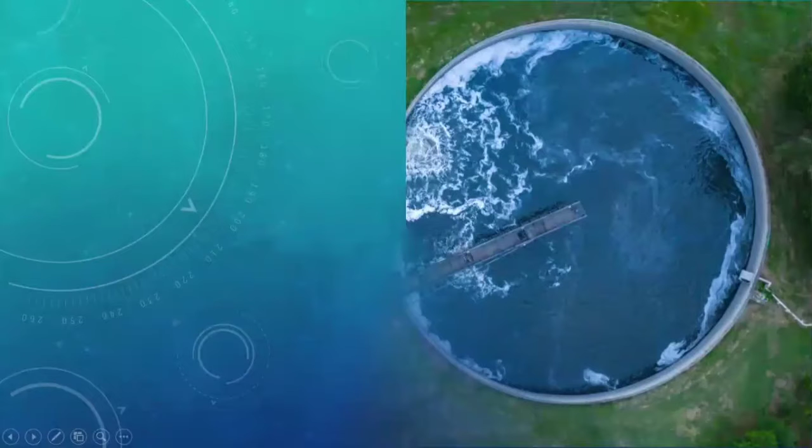Today we will discuss the importance of sewage treatment in India. This presentation is made by me, Nirmala Machi, and Songramjit Roy, from the Department of CSE Second Year, MCKVIE.

Some of the key points of this topic are: what is sewage, types of sewage, what is sewage treatment, objective, necessity of sewage treatment, advantages and disadvantages of sewage treatment plants in India, and many more.

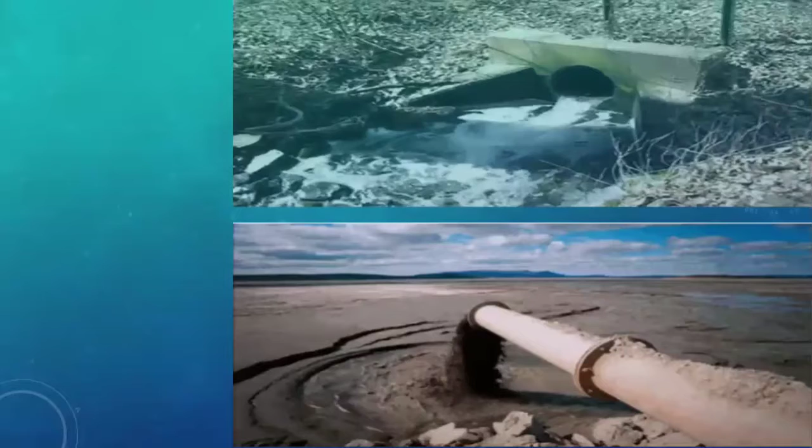Moving to the next slide, what is sewage? Sewage is a type of wastewater produced by a community of people. Sewage is more than 99% water, but the remaining material contains solid material, ions, and harmful bacteria. It is typically transported through a sewer system, mainly carried from residences and from commercial, institutional, and public facilities that exist in the locality.

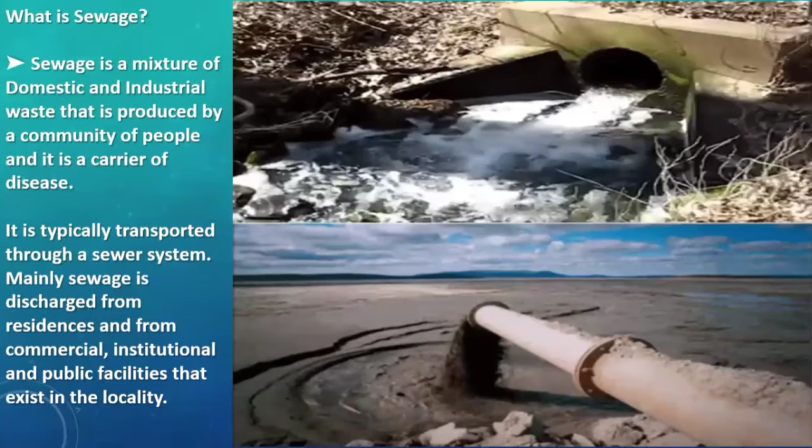What are the components of sewage? Sewage sludge is composed of both inorganic and organic materials: a large concentration of some plant nutrients, a much smaller concentration of numerous trace elements and organic chemicals, and some pathogens. According to researchers, an adult person produces around 162 liters of sewage per day.

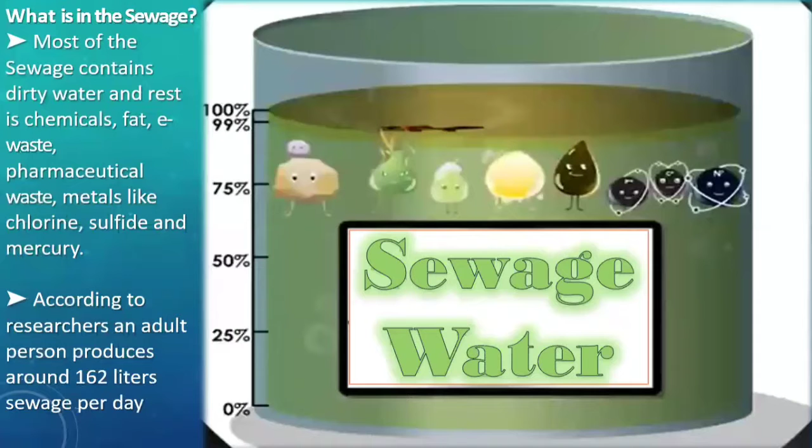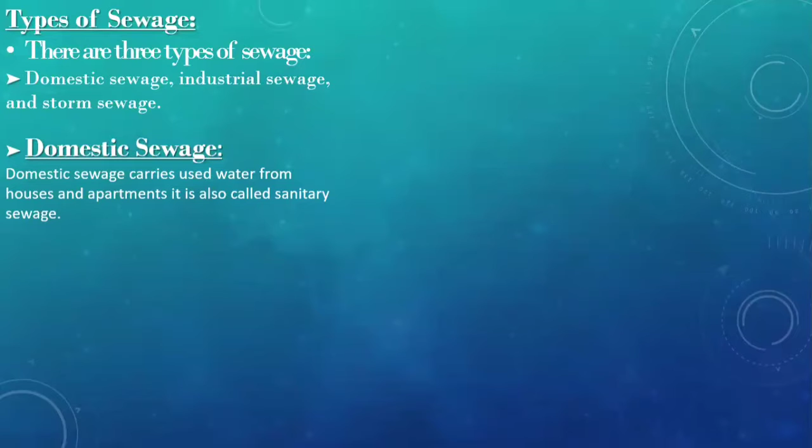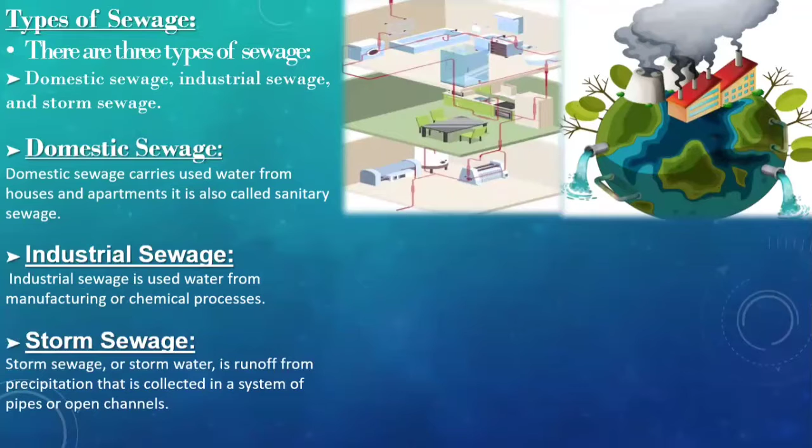Now we are discussing types of sewage. There are three types: domestic sewage, industrial sewage, and storm sewage. Domestic sewage carries used water from houses and apartments; it is also called sanitary sewage. Industrial sewage is used water from manufacturing or chemical processes. Storm sewage, or storm water, is runoff from precipitation that is collected in a system of pipes or open channels.

Now, how bad is wastewater for our environment? There are mainly 5 topics we are discussing. Number 1, water and habitat contamination. The most immediate effect of wastewater on the environment is that it contributes toward the contamination and destruction of natural habitats and the wildlife that live in these habitats, by exposing them to harmful chemicals that would otherwise not be present over the natural course of things.

Number 2, squalor. Wastewater is one of the worst sources and carriers of diseases. According to a report from WHO, more than 3.4 million people die each year from waterborne diseases. Besides the diseases wastewater carries, the combination of human waste, solvents, and paints create fumes that are not only putrid, but also expose people to harmful fumes.

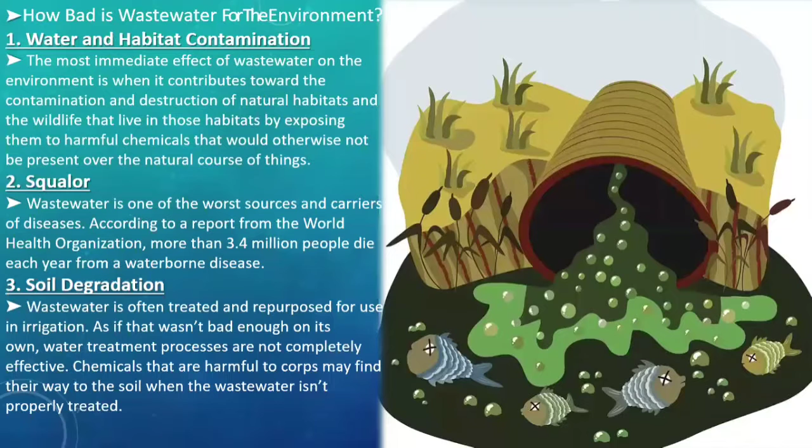Number 3, soil degradation. Wastewater is often treated and repurposed for use in irrigation, as if that wasn't bad enough on its own. Water treatment processes are not completely effective; chemicals harmful to crops find their way to the soil when wastewater isn't properly treated. These chemicals cause the soil to yield fewer crops at a slower rate. Consider also that these crops will eventually be eaten, which can also harm humans.

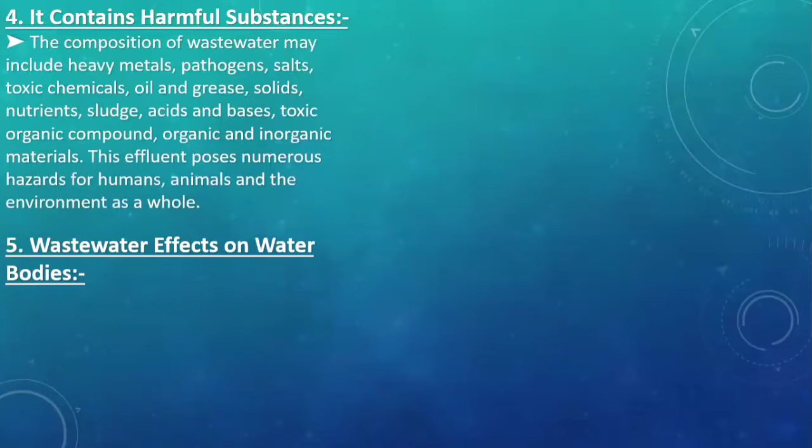Number 4, it contains harmful substances. The composition of wastewater may include heavy metals, pathogens, salts, toxic chemicals, oil and greases, solids, nutrients, sludges, acids and bases, toxic organic compounds, and organic and inorganic materials. This effluent poses numerous hazards for humans, animals, and the environment as a whole. It can be toxic, corrosive, reactive, acidic, and ignitable. Therefore, it must undergo treatment before being reused or redirected into the water supply.

Number 5, wastewater effects on water bodies. Waterways are generally most at risk to the harmful effects of wastewater. Toxic compounds in the effluent disrupt aquatic ecosystems. When a large amount of biodegradable substances end up in the water, organisms start to break them down and use a lot of dissolved oxygen, which is critical for marine life to thrive. As it becomes depleted, it can be life-threatening for fish.

Wastewater also contains oil and greases that are harder to break down and can settle on the surface of the water. This blocks the light that photosynthetic aquatic plants need. It can also suffocate fish and get caught in birds' feathers. Heavy metals such as lead and mercury are toxic to both humans and animals. If someone drank from or ate fish from a contaminated water source, they could suffer serious health effects. The same happens with animals and plants living in the water.

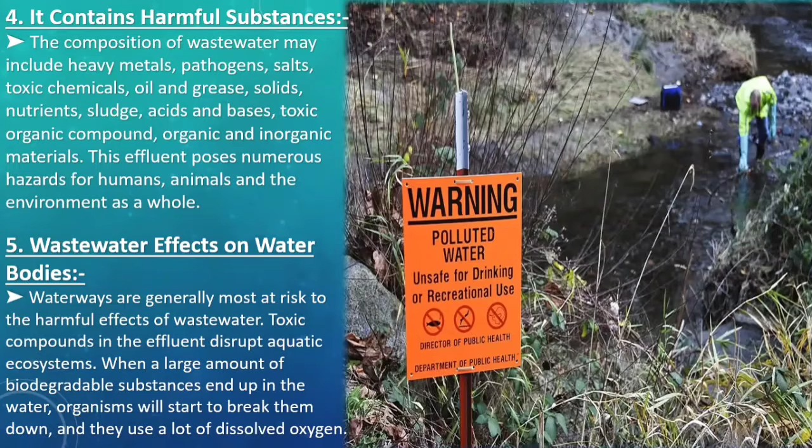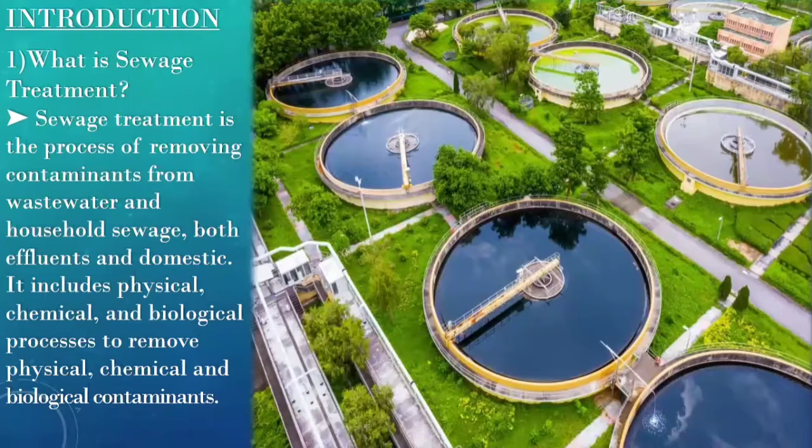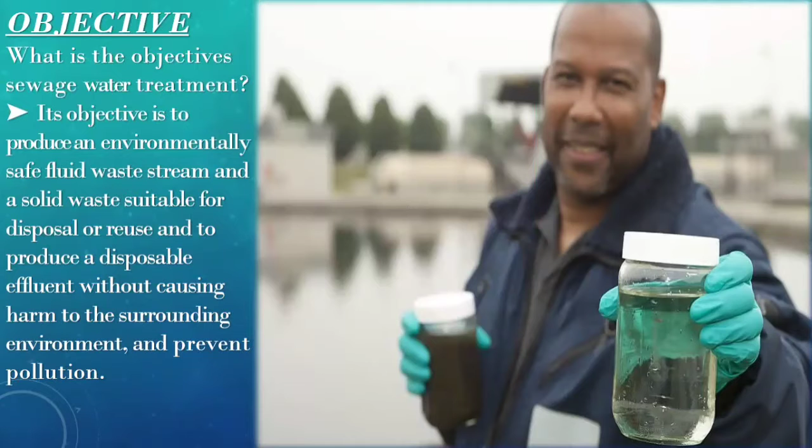Now, moving on to the introduction part: what is sewage treatment? Sewage treatment is a type of wastewater treatment which aims to remove contamination from sewage to produce an effluent suitable for discharge to the surrounding environment or intended reuse application, thereby preventing water pollution from raw sewage discharges. The objective of sewage treatment: the major aim of wastewater treatment is to remove as much suspended solids as possible before the remaining water, called effluent, is discharged back to the environment. As solid material decays, it uses up oxygen which is needed by the plants and animals living in the water.

Now, the necessity of sewage treatment. Sewage treatment plants play an important role for the community of people and our beloved environment. The main function of these plants is to clean the water that comes from home, commercial, and industrial streams.

The treatment of sewage water has become the need of the hour as it stops spreading the diseases and illness caused by sewage water. It helps society by making the water pollution free, and it also helps to clean the environment.

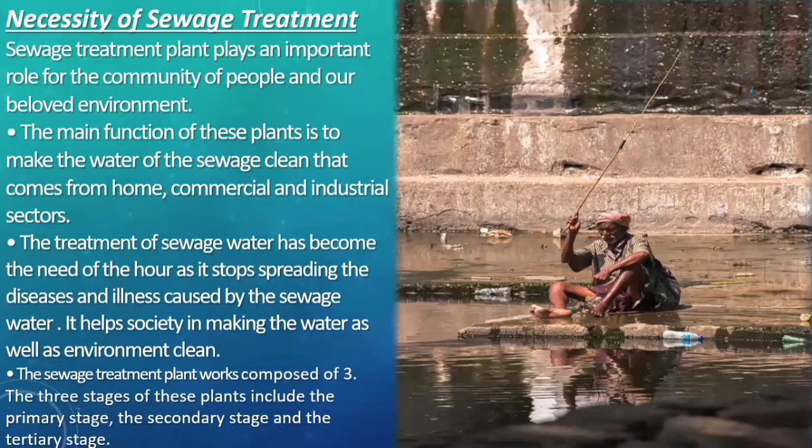The sewage treatment plant's work is composed of three stages. These include the primary stage, the secondary stage, and the tertiary stage. Now, I would like to invite Sangramjit to continue from the stages of sewage treatment.

Thank you, Nirmallo. Now we will see the stages of sewage treatment. There are three main parts of sewage treatment: primary treatment, secondary treatment, and tertiary treatment.

Primary treatment can be divided into three parts, namely screening, pumping, and grit removal, and primary clarification. Secondary treatment can be divided into three categories: aeration, secondary settling, and filtration. And the main part of the tertiary stage is disinfection.

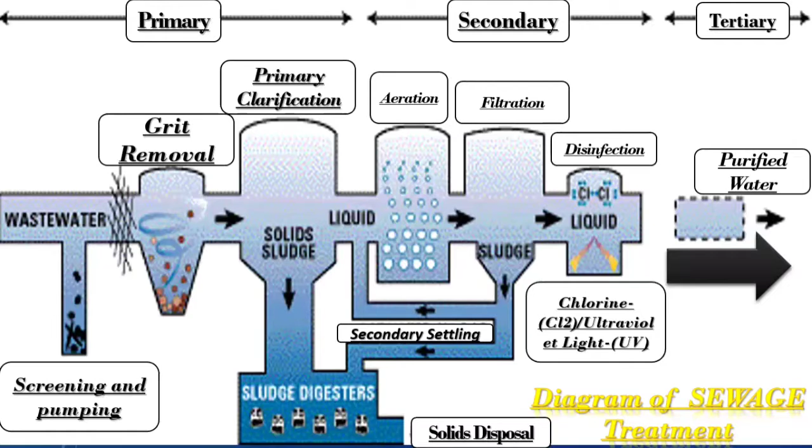Now we will see the primary stages of sewage treatment. Step 1 is screening and pumping. The incoming wastewater passes through screening equipment where objects such as rags, wood fragments, plastics, and greases are removed.

The material removed is washed and disposed of in a landfill. The screened wastewater is then pumped into the next step, grit removal.

Step 2 is grit removal. Grit removal is the process used to remove sand, silt, and grit from water. It can also be used to remove sand from river water intake prior to processing for potable water, used in industrial applications to remove abrasives, as well as being used to remove grit entrained in sludge.

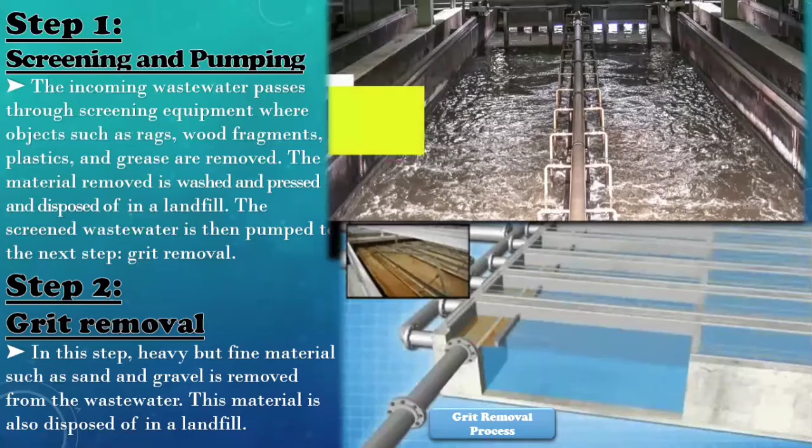Now, our next step is primary settling. Primary settling is a sanitation technology that removes suspended solids and floating organic materials. The material which will settle is taken out using large circular tanks called clarifiers.

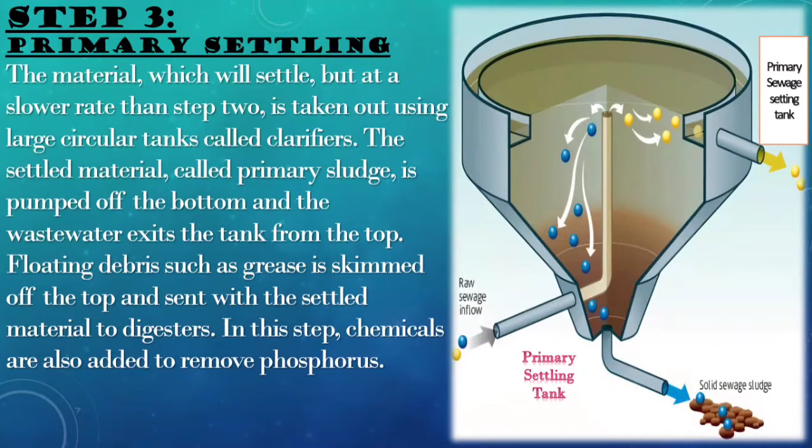The settled material, called primary sludge, is pumped off the bottom, and the wastewater exits the tank from the top. Floating debris such as grease is skimmed off the top and sent to digesters. In this step, chemicals are also added to remove phosphorus.

Now we will see the secondary stages of sewage treatment. Step 4 is aeration, or activated sludge. Aeration is the process by which air is circulated through, mixed with, and dissolved in a liquid substance.

Aeration brings water and air into close contact in order to remove dissolved gases and to oxidize dissolved materials, including iron, hydrogen sulfide, and volatile organic chemicals. Through biological degradation, the pollutants are consumed by microorganisms and transformed into cell tissue, water, and nitrogen.

The biological activity occurring in this step is very similar to what occurs at the bottom of a lake or river, but in these areas, the degradation takes years to accomplish.

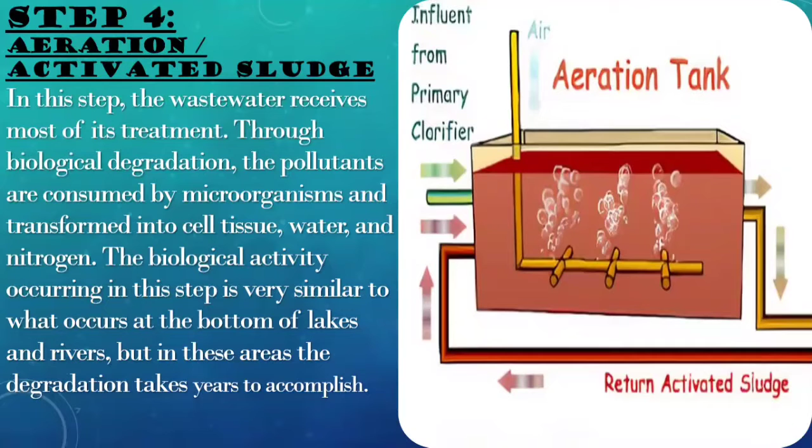Step 5 is secondary settling. Secondary settling is the final step of the activated sludge based biological wastewater treatment. Large circular tanks called secondary clarifiers allow the treated wastewater to separate from the biology from the aeration tanks at this step, yielding an effluent which is now over 90% treated.

The activated sludge is continuously pumped from the bottom of the clarifiers and returned to the aeration tanks in our step 6. So our step 6 is filtration.

Water flows through a filter designed to remove particles from within it. The filters are made of layers of sand and gravel, and in some cases, crushed anthracite. Filtration collects the suspended impurities in water, enhancing the effectiveness of disinfection.

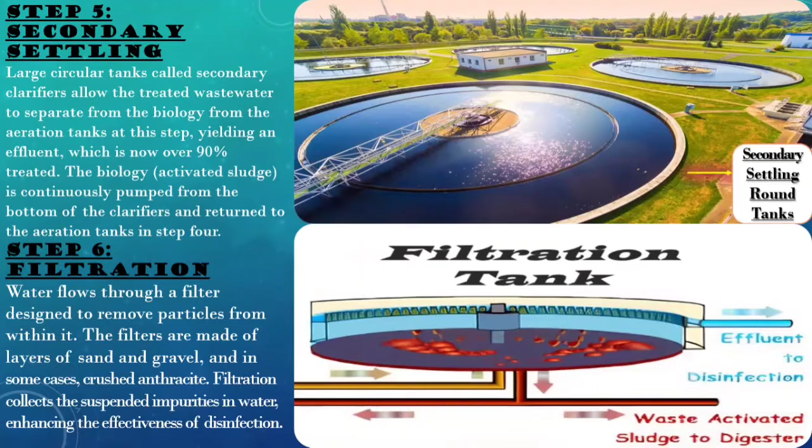Now we will see the tertiary stages of sewage treatment: disinfecting. The process of tertiary disinfection may take a few different forms. The first form is chlorine treatment.

Chlorine is one of the most commonly used disinfectants in wastewater treatment because it is budget friendly, easy to use, and effective. Wastewater treatment plants can dump chlorine into the wastewater to kill harmful microorganisms like bacteria and viruses.

However, chlorine can harm aquatic ecosystems, so chlorinated wastewater requires dechlorination before discharge into the environment. When chlorine reacts with organic material, it can also sometimes form potentially carcinogenic compounds like trihalomethanes and mutagens.

Ultraviolet light treatment. Ultraviolet light is a common disinfectant in tertiary treatment. The wastewater flows under banks of UV lights, and the light sterilizes microorganisms by damaging their genetic structures. Ultraviolet light does not typically kill viruses and bacteria, but it renders them unable to infect humans or wildlife.

The effluent must have received aggressive treatment beforehand, because any residual organic matter can shield the microorganism from the UV light. The lamps also require a relatively high level of maintenance.

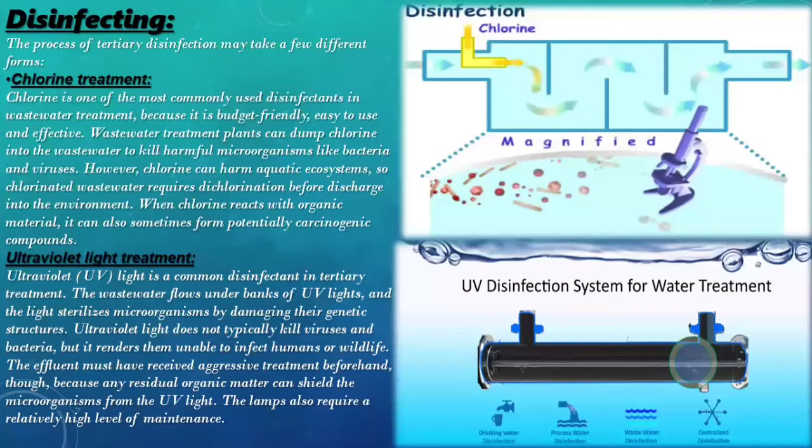Moving to ozone treatment. An alternative method is to use ozone, a compound formed by using electrical energy to add a third oxygen atom to standard diatomic O2, as a disinfectant. Ozone is highly reactive and can destroy most microorganisms it comes into contact with. It is safer than chlorine because plants can generate it on site as needed rather than storing it over the long term and risking a toxic leak.

It also will not form hazardous byproducts in the water. The treatment equipment is relatively expensive to maintain.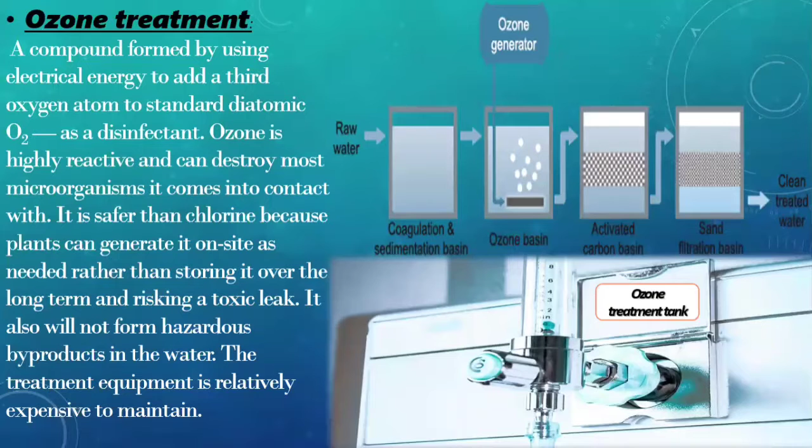Now, I would like to invite Shoham to continue from the advantages and disadvantages of sewage treatment. Thank you, Shangramjit, for informing us about the sewage treatment stages. So now I want to talk about the advantages and disadvantages of sewage treatment.

First, we will know about the advantages. There are total 5 advantages. The first is it provides clean, safe water processed. It is unknown to some people that wastewater can be turned into reusable water. Toxins are removed during the treatment process, which produces clean and safe water. About 3% of Earth's water is drinkable. It is a renewable resource, however it takes a long time for evaporation and rain to remove toxins. With wastewater treatment, the process is faster and helps provide crystal clear and safe reusable water.

The second point is saving you money. A well-maintained and operated industrial wastewater treatment system can facilitate saving money in the long term, and in turn ensure you comply with regulation and legislation.

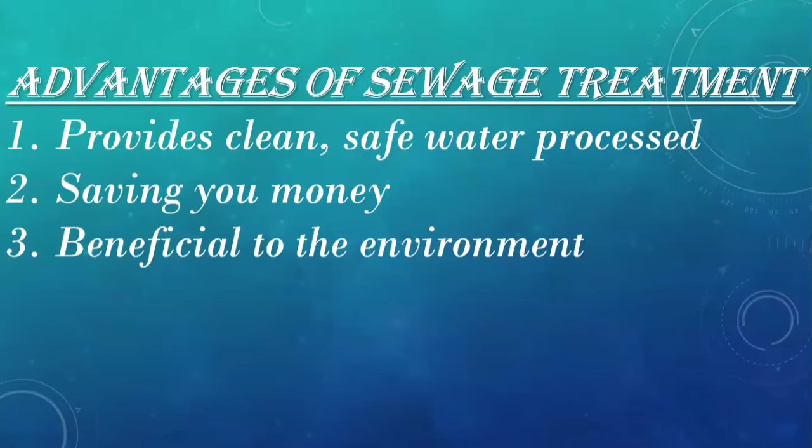Number 3, beneficial to the environment. The main aim for treating the water is to remove harmful chemicals. Therefore, there won't be any negative impact on the environment when it enters the ground. It could be cumbersome if you are dealing with industrial waste. A high quality wastewater treatment system is recommended as an important investment.

Number 4, saving water. You are really saving water due to the effluent treatment plant. As the plant recycles old water, it means the water waste is less, which again is good for the environment.

Number 5, a way to minimize waste. Industrial wastewater treatment is a way to reduce waste from your environment. Just as it helps save money, it also ensures you are removing chemically treated water in a safe, environmentally friendly manner.

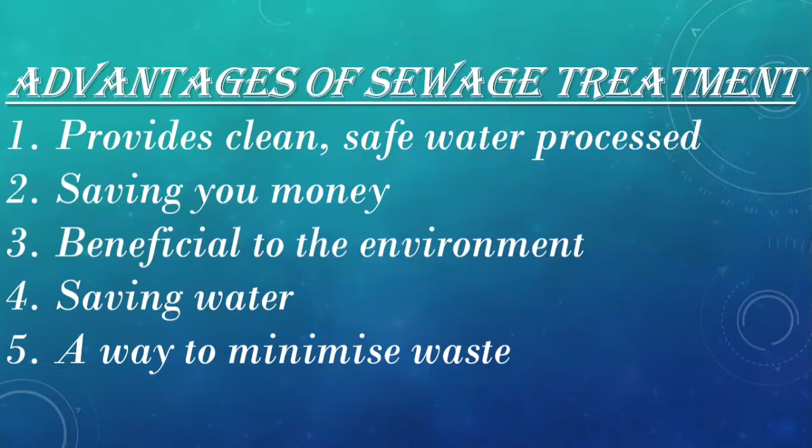Now going to the disadvantages. There are 5 disadvantages, which are first, installation cost. When compared with a connection to your local town sewage or a septic tank setup, the cost of a sewage treatment plant can be seen as a disadvantage. However, once installed and up and running, the costs are minimal and the life of the system will extend past that of a septic tank.

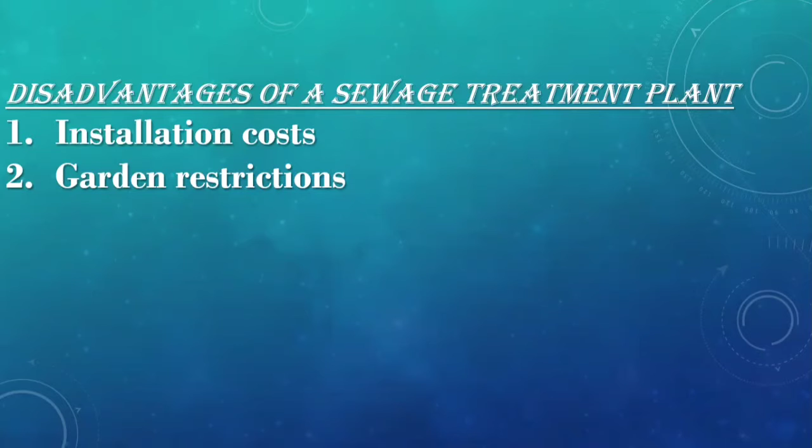Number 2, garden restriction. Care needs to be taken with the plants in the absorption area, which can restrict the kind of garden you have. It is recommended that edible plants are not used. Only grass or shrubs or trees with shallow root systems are included. No large trees or shrubs in the area as they can cause the pipes to block.

Number 3, routine pumping out. Yearly or bi-yearly pumping out is required to remove the buildup of sludge and scum to avoid clogging the flow of waste and allow the system to operate effectively and efficiently. Failing to carry out solids removal can lead to system shutdown.

Number 4, bacteria. A delicate balance of bacteria within the treatment plant helps to naturally break down the sewage. This balance can be disrupted under certain circumstances, which can lead to a slowing down or even stopping of the treatment process. For example, bacteria can be damaged due to a sudden increase in wastewater from your home, the use of harsh chemicals in home, or ambient temperature changes, and an imbalance can result in contaminated waste being discharged to the surrounding environment.

Number 5, treated water absorption. Wastewater absorption can be affected in very wet areas or during excessively rainy periods. The local climate in your area needs to be taken into consideration by the installation engineers.

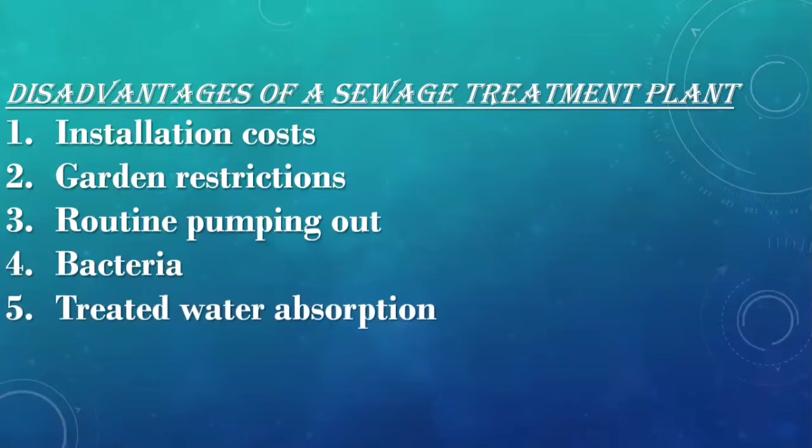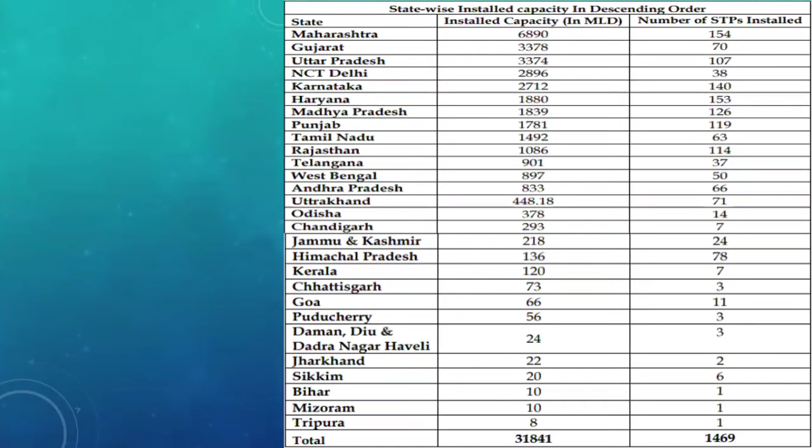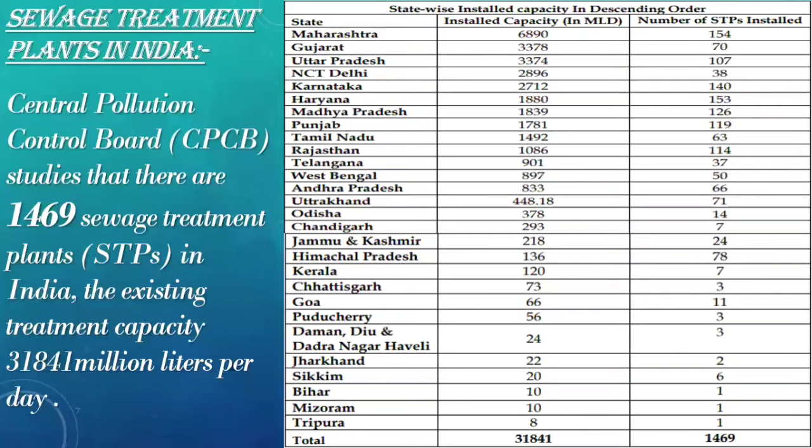Moving to the next slide, I would like to talk about the STPs, or sewage treatment plants, in India. There are 1,469 sewage treatment plants in India with an existing capacity of 31,841. You can see the diagram where the number of STPs present in each state, and the installed capacities of STPs, are mentioned.

Now I would like to talk about some of the treatment plants in India. The first treatment plant in Northeast India.

The Imphal sewage treatment plant is the first one in Northeast India. The Imphal sewerage project phase 1, with a capacity of 27 MLD, was constructed at a cost of 345.43 crore and was launched in 2005.

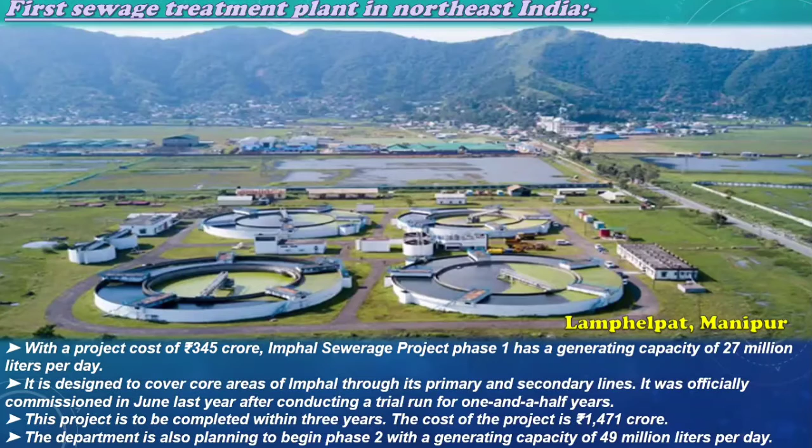The primary objective of implementing the sewage treatment plant in Imphal is to control pollution in the Nambul River, which flows into Loktak, the largest freshwater lake in Northeast India. The department is also planning to begin phase 2 with a generating capacity of 49 million liters per day. This project is to be completed within 3 years at a cost of 1,471 crores.

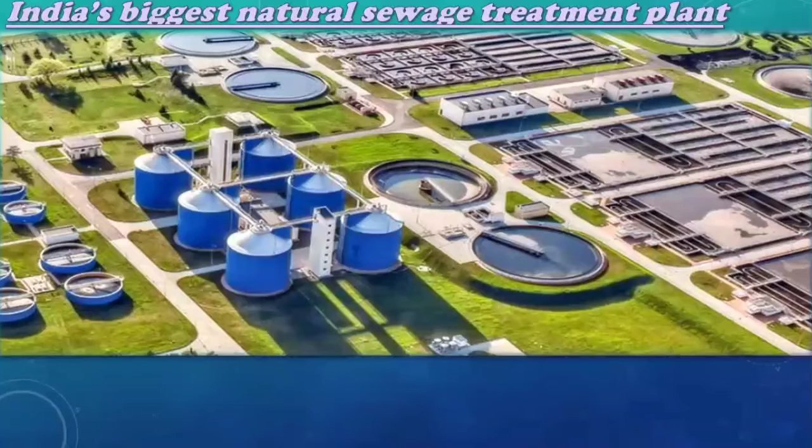Next is the natural sewage treatment plant. This is the biggest natural sewage treatment plant in India. The Municipal Corporation of Tirupati, MCT, has recently taken up an eco-friendly project, a natural sewage treatment plant of 5 million liters per day capacity. It is the biggest in the country after the 3 MLD natural STP in Delhi.

The project cost is estimated to be around 14.97 crores. The plant will recycle sewage flowing through drains starting from the upstream areas and passing through areas on the north side of the city, joining the escape drain close to Vinayak Sagar Lake.

Moving to the next slide, this is the biggest sewage treatment plant in India. The Delhi Jal Board, DJB, is setting up a new sewage treatment plant at Okhla, which it claims will be the largest sewage treatment plant in India, at a cost of 1,161 crore. The plant will have a capacity of 56.4 crore liters per day.

The new STP will be set up under the Yamuna Action Plan 3 scheme. The plant will treat the wastewater that goes into the Yamuna directly. The plant will remove 41,200 kg of organic pollutant load and 61,600 kg of solid load per day. This will help in reducing the pollutants in the Yamuna.

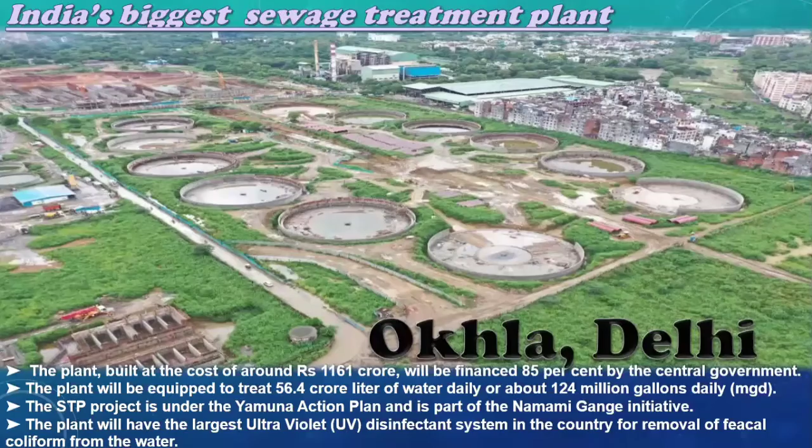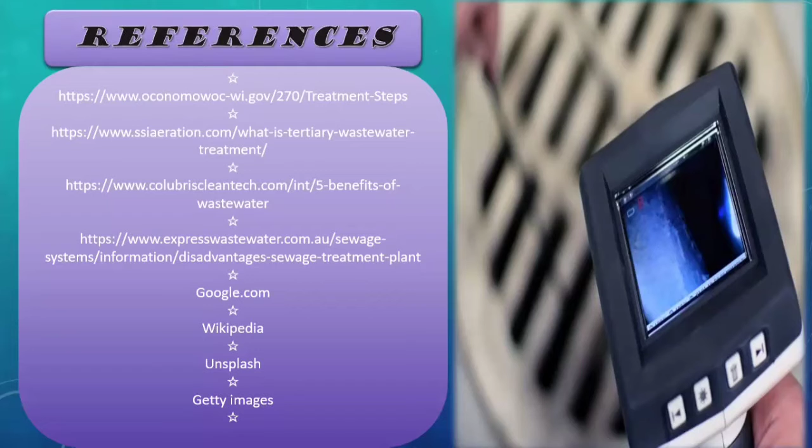This is the reference part. The links are down below from where we gathered the information and collected the images from Google. I want to end our presentation here with a vote of thanks. Thank you everyone for listening to us.

Okay, very good presentation, very good. And total, your information, total information is there. And I have one question: which type of bacteria is used for the sewage treatment?